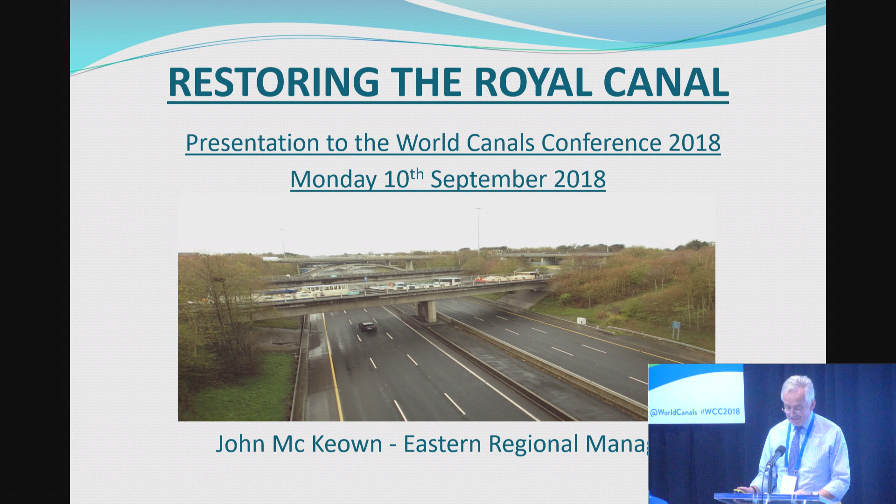Firstly, I'd like to give you a brief historical background of our inland waterways. Like any restoration project, it's a classic story, so it has a happy ending. The photograph you see on the screen there was conditions of lock gates that I would have come across back in 1987, at the 18th lock in Thomastown, where some of the Royal Canal Amenity Group and Inland Waterways Association tried to staunch the gates by putting plastic up along them to try and keep water back in the levels again. We're going to cover 229 years in about 20 minutes, so I'll ask you to fasten your seatbelts and away we go.

From the middle of the 18th century to the middle of the 19th century, there was an extensive network of inland navigations constructed in Ireland, mainly by governments and private corporations. It was mainly there to provide an efficient means of transporting the goods that were transported on the poor road system at that particular time. But the network consisted of about 1,350 kilometres of canal, 270 locks, and many fine structures of arch bridges, aqueducts, weirs, siphons, and culverts.

It was proposed in the 1715 Act of Parliament that a large number of the rivers in all 4 provinces in Ireland were to be made navigable and were going to be linked via a series of navigable channels. While the main act was to develop the bogs and wasteland of the Midlands, it was envisaged that the opening of the navigation canals and rivers would improve the communication throughout the country.

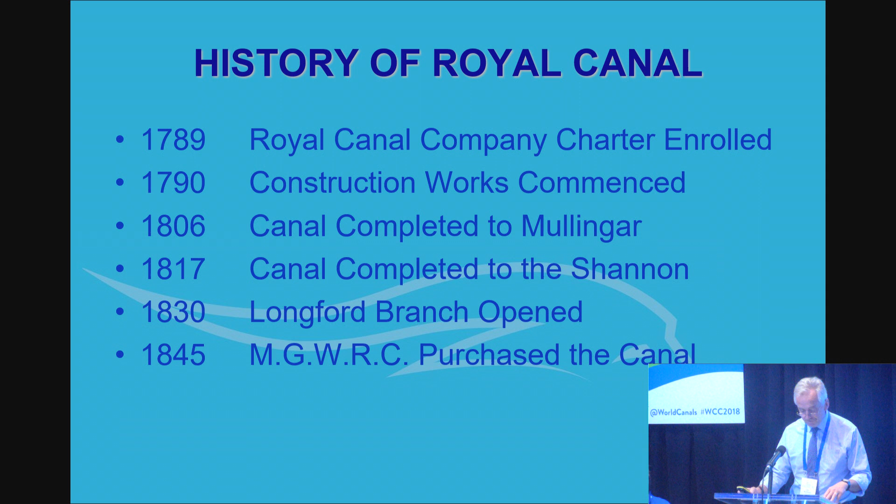Spencer Dock then was opened in 1873, which is much later, and with the Midland Great Western Railway Company purchasing most of the canal, it was the adjacent lands that they were interested in, in order to put the railway going westwards.

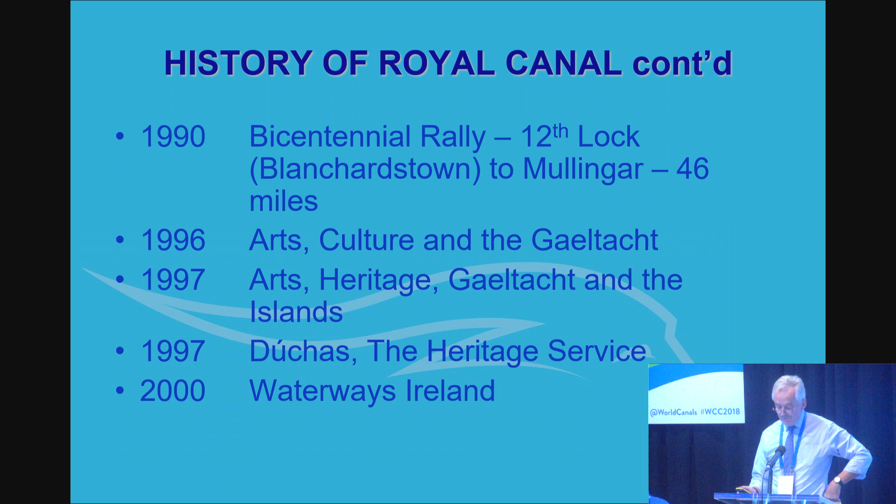Construction of the Royal Canal was to prove long and expensive - approximately 90 miles in length, it cost about 1.35 million, which was 15,000 per mile, and considerably more than the Grand Canal at that time. But the extravagant scale of the fine harbours, aqueducts and structures were much better than the Grand Canal.

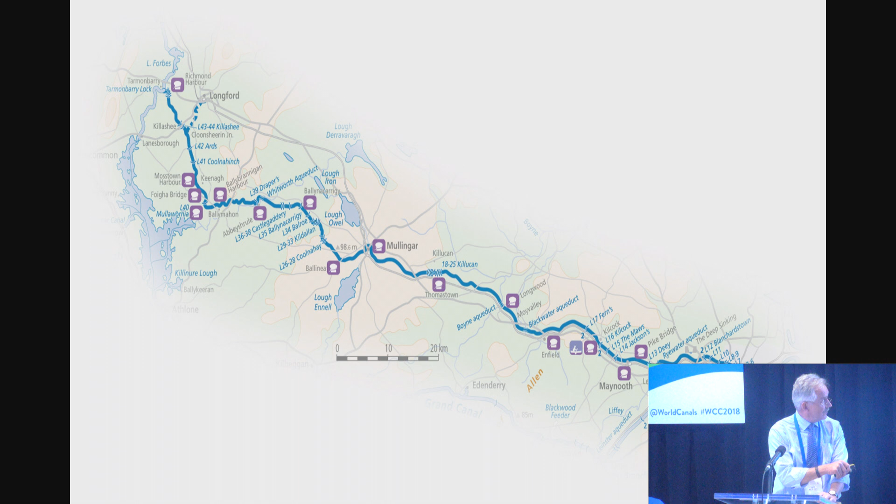The route of the canal as well, as I said, goes right up through Dublin, through Maynooth, Kilcock, Enfield, up to Thomastown where you've got this flight of locks, into Mullingar, onto the summit level, which is from here to here, and then the extension right down to the Shannon on the western side.

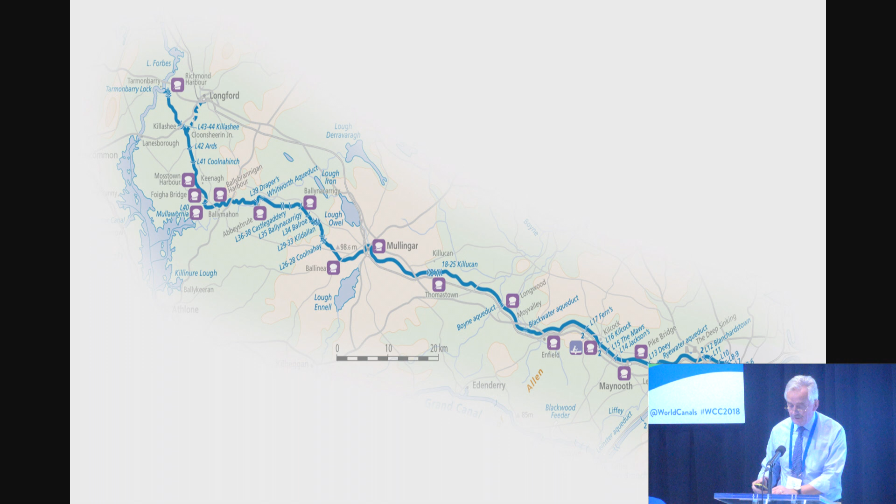The canals in Dublin, here, right up through where we've got various structures going right up through, and our offices are based here at Lock 10 on the Royal Canal. As we move out then, it explains it as well.

Many fine aqueducts, as I mentioned earlier, and some of those restoration works I will actually explain to you now.

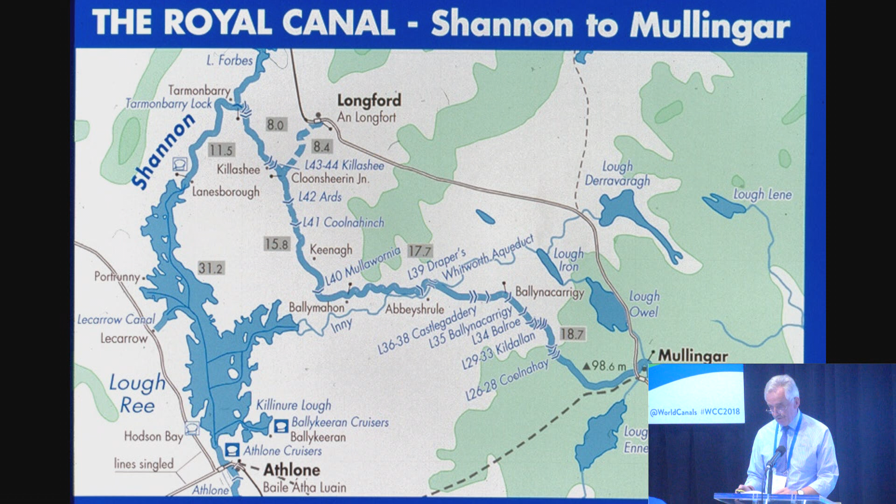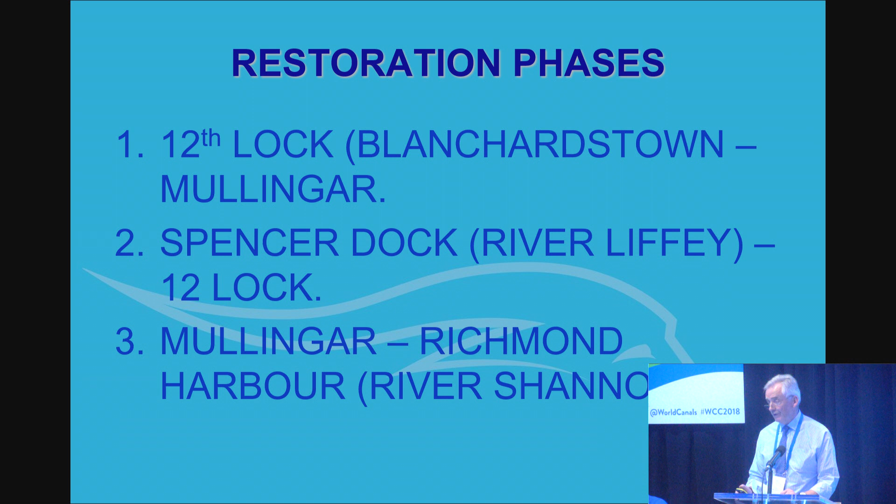The restoration took 3 phases. We decided to go for the low hanging fruit first, and the 12th lock at Blanchardstown to Mullingar was the first phase. Spencer Dock to the 12th lock was only a 6-mile stretch, which was actually very costly due to the removal of all the dredged material, and Mullingar then to Richmond Harbour.

CIE, in their wisdom, who were the previous owners of the canal, decided to truncate the beams - they were cut off so that they wouldn't be used for navigation. And then everything disintegrated thereafter, with weeds growing up in the channel.

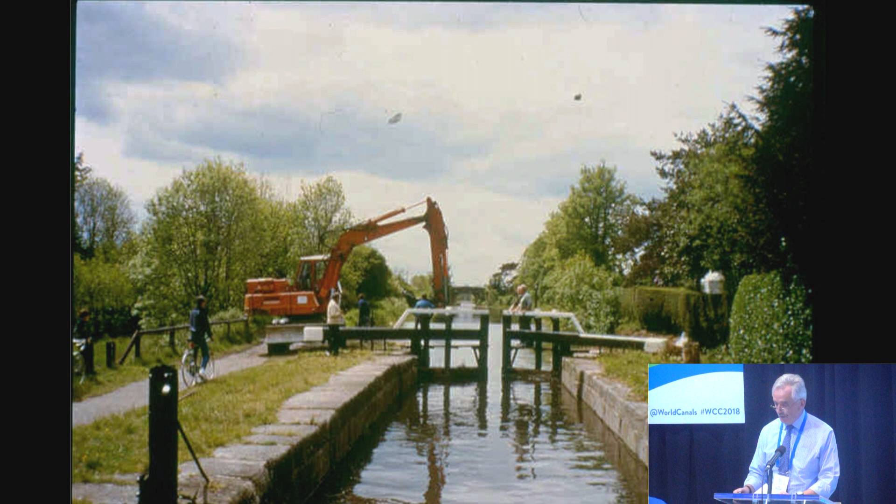This is what it looked like when the gates were installed by the Royal Canal Amenity Group before we took over in 1986. This is what it looks like today - a bustling restaurant, a 10-bedroom hotel on the left-hand side, and apartments on the right-hand side.

And then one of the barges, one of the heritage boat barges, travelling through the lock during one of their rallies.

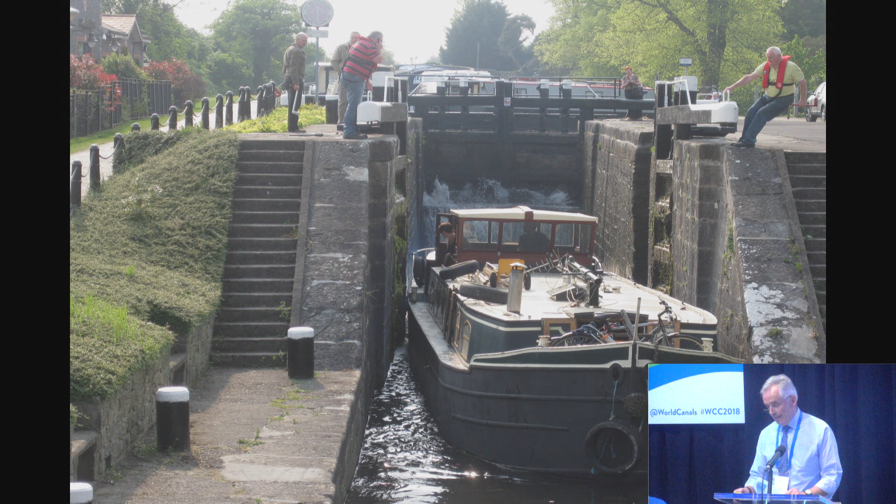We are continuously making up the lock gates. We're passing on those artisan skills, which is very important. These are lock gates that were currently installed at the 17th lock, at the start of the long level.

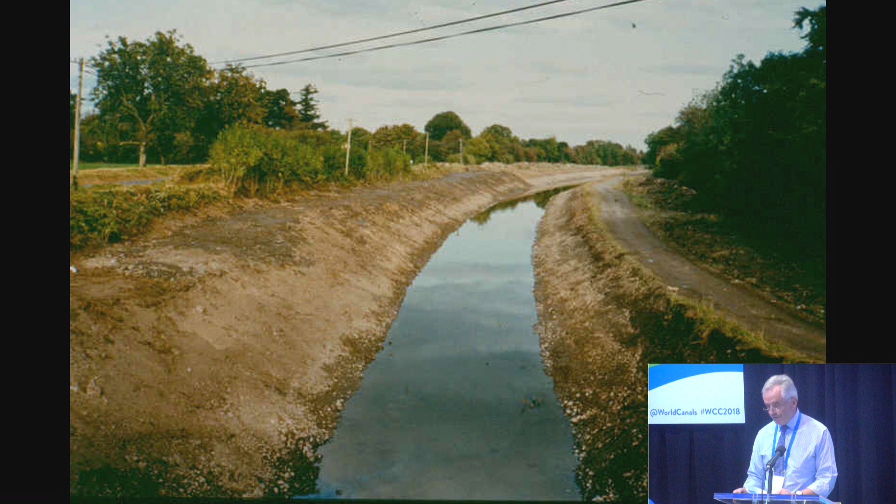Some more of the pre-restoration. If you keep an eye on the overhead ESB lines there, you'll see them again with the dredge channel - lock gates in dire need of repair, and restored.

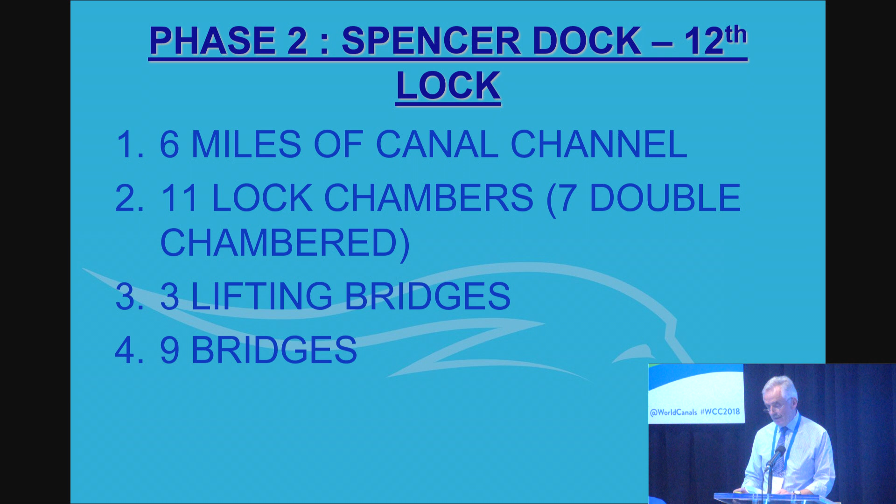Phase 2, as I said, was a 6-mile length of channel, but with a lot more structures, lifting bridges and obstructions to restore. We had the Scherzer bridges at the entrance to Spencer Dock - that's a boat entering now, so it was actually navigable, going up into Spencer Dock itself.

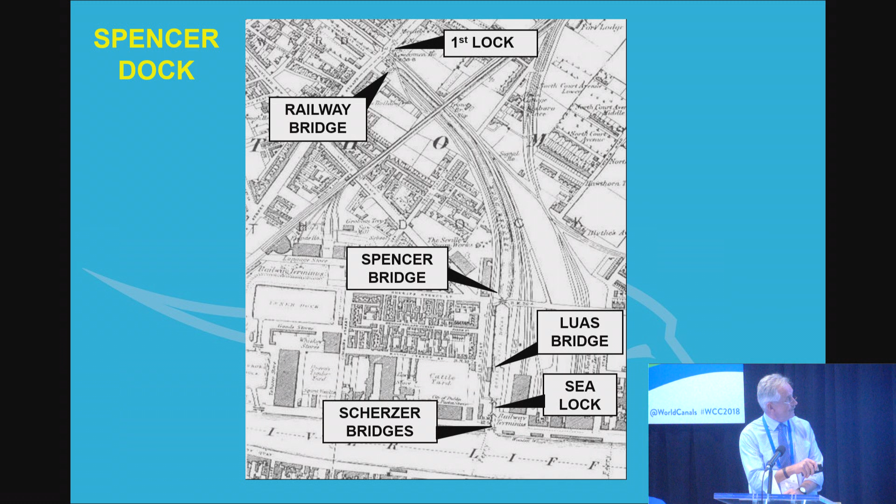In Spencer Dock we had a lot of obstructions. As I said, the Scherzer bridges at the entrance, you had the sea lock which had to be reconstructed as both a navigational lock and flood control, a new Luas bridge, new transport, Spencer Bridge, and the railway bridge up here, the Newcomen lifting bridge. So there was a lot of obstruction in this stretch, which was originally tidal and then made non-tidal with the installation of these new gates.

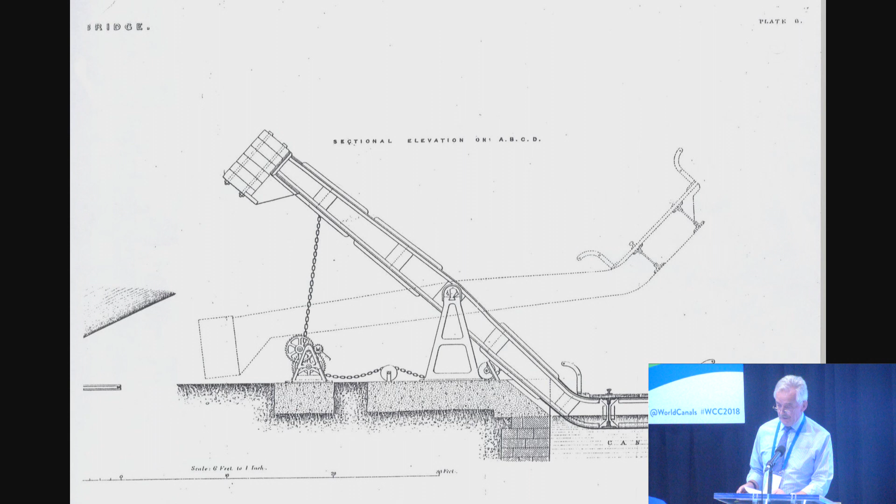We had one of these particular bridges, called a lifting or bascule type bridge, a balance bridge, which was taken out by CIE at the time. This was a drawing of it, which we still have in the office. This is what we were left with - hopefully nobody here works with CIE because I'm throwing a few curveballs at them. They put in culverts in the canal, which meant some boats coming through couldn't get through because of these culverts, so we had to think of a method of taking them out. A lifting bridge was put in place, and here it is with a barge passing out through it.

The interesting point is, whenever we were dredging this particular stretch, we couldn't leave the excavators out at night time because we were scared they'd be broken into, tracked up the bank, the wall broken down, and there'd be a massive escape. So we had to bring them in through that gate into the vacuum - anybody who knows anything about prisons, there's a vacuum between a high wall and an inner wall - so it had to be parked in the vacuum. That was laborious, getting it in every evening across an old Bailey Bridge.

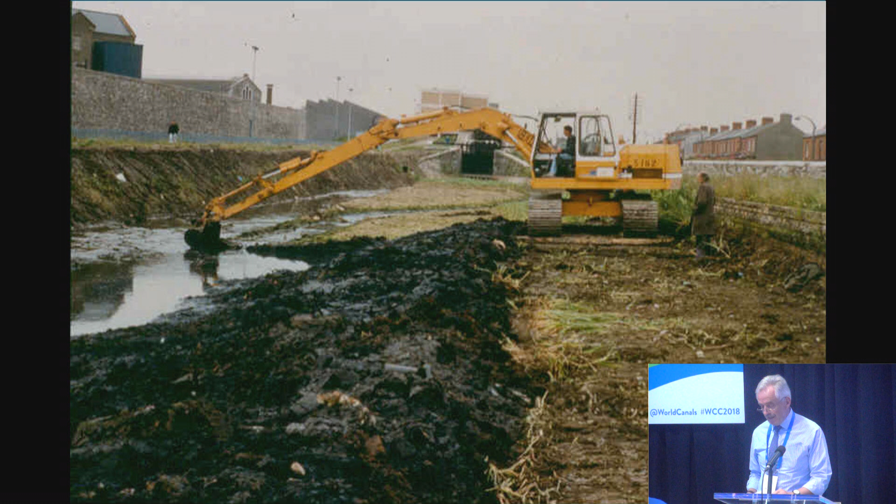As you can see, the wide stretches of the canal had to be bitten at in several chews. The machine was down in the bed of the canal itself, pulled back, and then worked from the bank, and all that material had to be moved away by Moxy dumper. This is what it looks like today, the same stretch.

Up at the 10th lock, the closest lock to our regional headquarters - and just in case you think I'm a real butcher altogether, you'll see the trees on the right-hand side. They're Leylandii, which are rubbish, yes, you don't have them. So I knew what I was doing, so that's what I did there, okay?

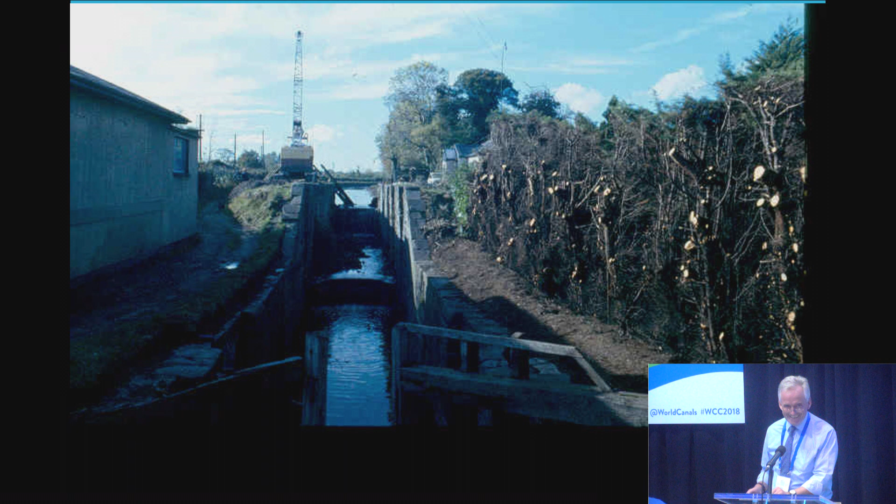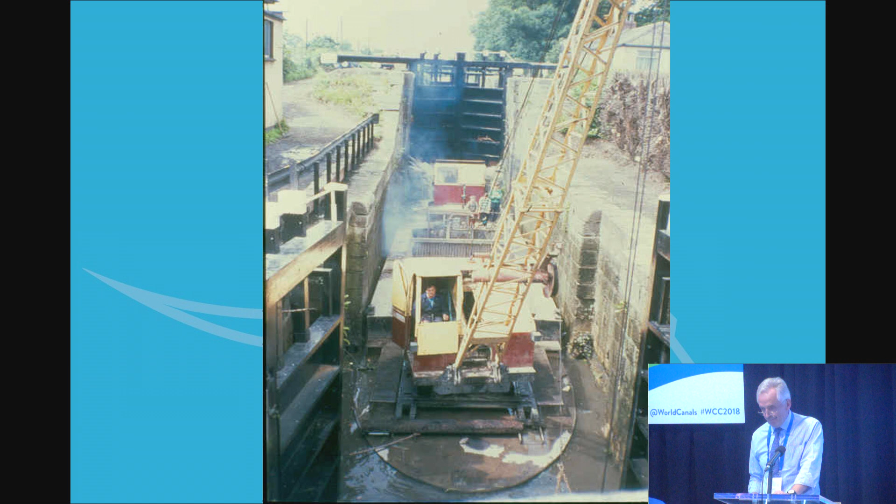So this was the canal without the gates, and this is a very important shot for me, because that particular machine there, called the 33M, did a lot of work on the canal dredging with a 10RB machine in front of it. That's all I was working with back in 1987 to the early 90s. So that means a lot to me, that machine going through the 10th lock fully restored.

Just to give you an example of one of the things we actually had to remove, or construct - the Navan Road interchange. This is the Royal Canal, with a railway running alongside it. They decided to build an interchange here, but then decided they needed a new orbital route travelling around the outskirts of Dublin, heading from Dun Laoghaire right through to the airport. Some of you might have passed below it, and some going on the post-tour will be visiting this structure on Thursday morning. So they decided: do we go over that junction or under it? They decided to go under it, and this is the next story.

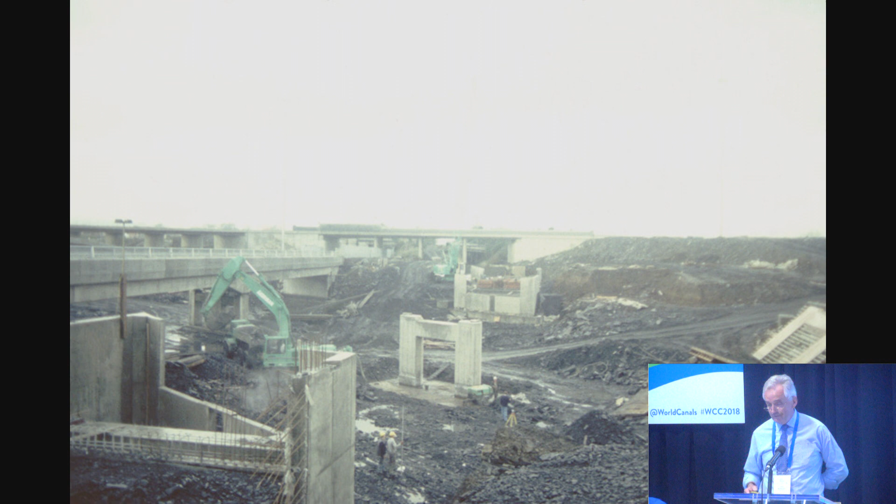So we actually had to build a new viaduct for the railway, a new aqueduct for the canal, while keeping the railway live and keeping the water flowing with inverted siphons - it was a nightmare. This was the channel itself with the fendering being put on, the Azobe fendering being put on to the side of the channel. This is in partial reconstruction.

This is it in another stage, with the M50, the main motorway, going in below. This is what it looked like when it was opened, with the canal going out through, the railway going out through, a major interchange. As I always say in giving talks like this here...

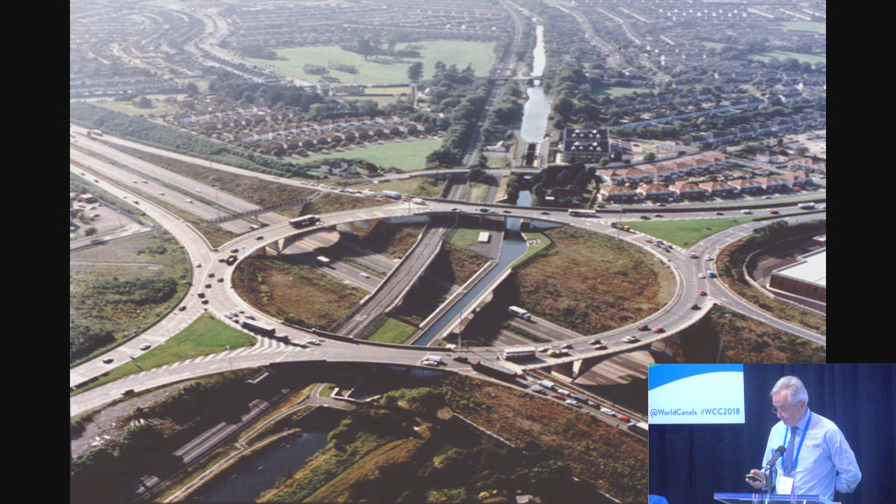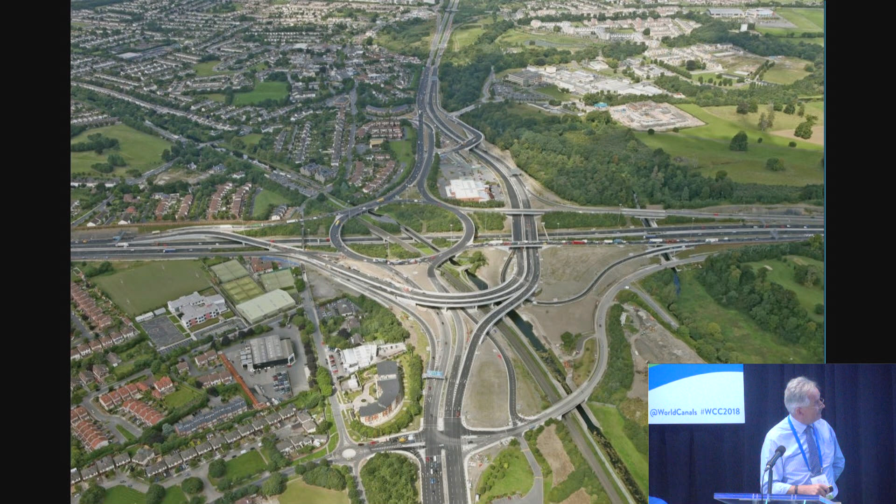England, or the Canals and River Trust, or British Waterways formerly, have a similar junction called Spaghetti Junction outside Birmingham. We call this, in Irish parlance, Tagliatelle Junction. Boats go out through it, and this is what it looks like today, even more complicated, with a whole series of roads going out round. So as you can see, it's a fairly complicated construction, but the canal has been kept alive right through it, and that's the most important thing.

One of the examples we had was a lovely masonry arch bridge at Moran's Bridge. Anybody that's experienced it, you can come up over that bridge and you don't know what you're going to see on the other side, because you come up over the crest of the arch. Unfortunately there was an accident at that bridge, and the local authority decided, no, we'll wipe it out and we'll put in this.

So the specification was that a small boat could get out through here, which was actually a small rollback weed boat. Now, I know that doesn't mean a lot to anybody, but Joe Caffrey there knows what a rollback weed boat is. So that was the specification, and you can see it's only a small boat.

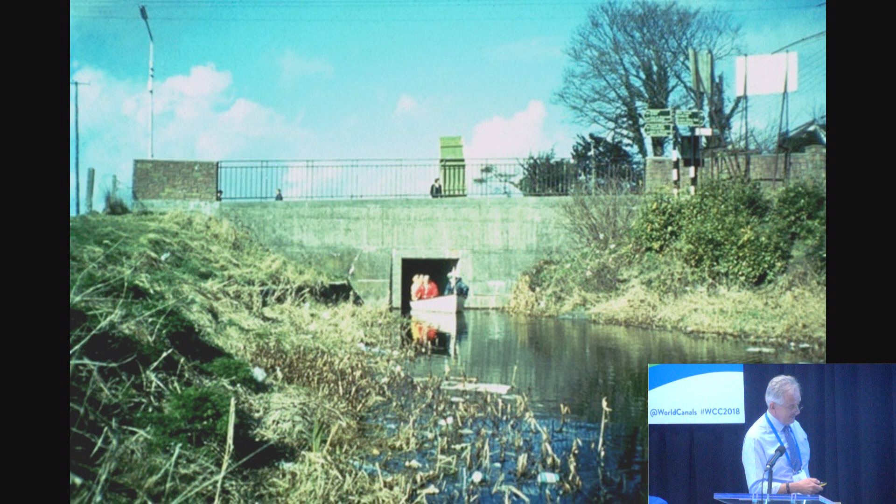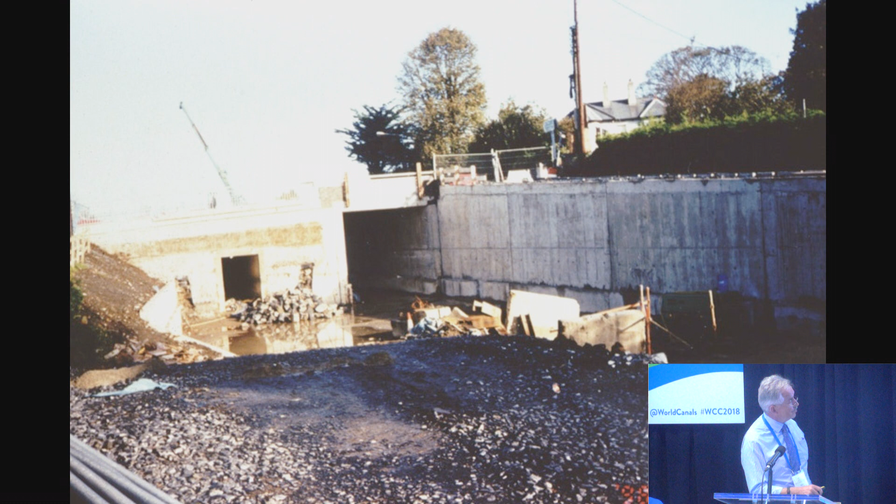So we actually had to think of a way we could get this solved. The solution was - that's the small opening that was left. We moved the whole thing 6 meters upstream and created a new channel for the boats. And that's what it looks like today, and that's some of the boats heading through it, the wilderness boats. Some of the UK visitors will know the wilderness boats.

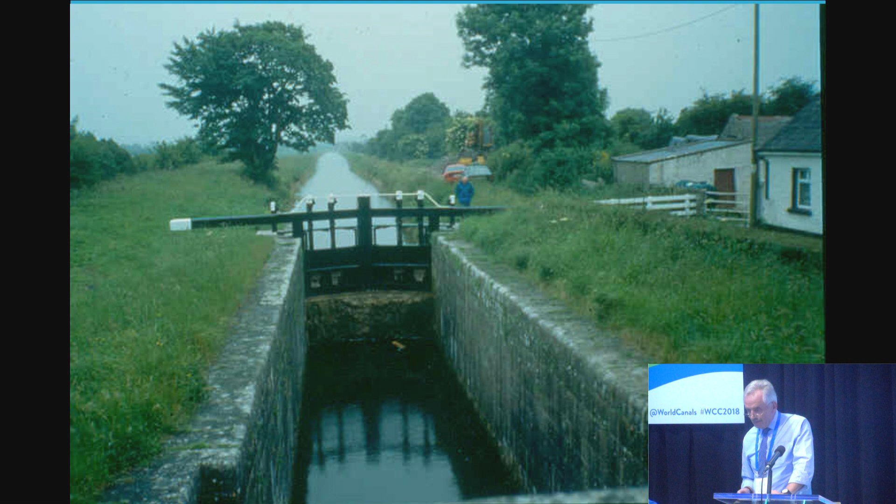Navigation preserved again. I'm only showing you a couple of examples, but there were actually 9 of these obstructions, each of them costing in the region of 2.25 to 2.5 million to remove.

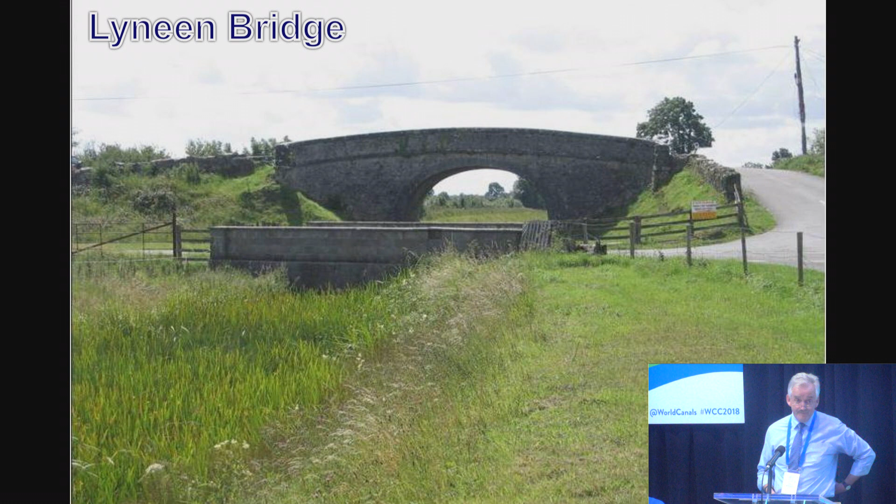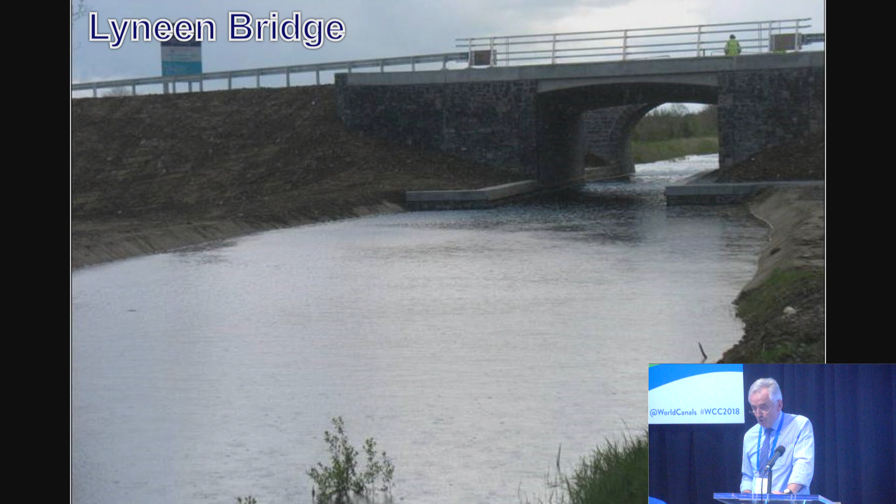So there's another obstruction, and that's what it looks like today, looking through the eye of the new bridge. That's the two of them living in harmony, the old and the new. And what costs the money is we have to super elevate the road coming up over the bridge to provide new sight lines, so that you don't come out over a masonry arch bridge and not see somebody before you hit them.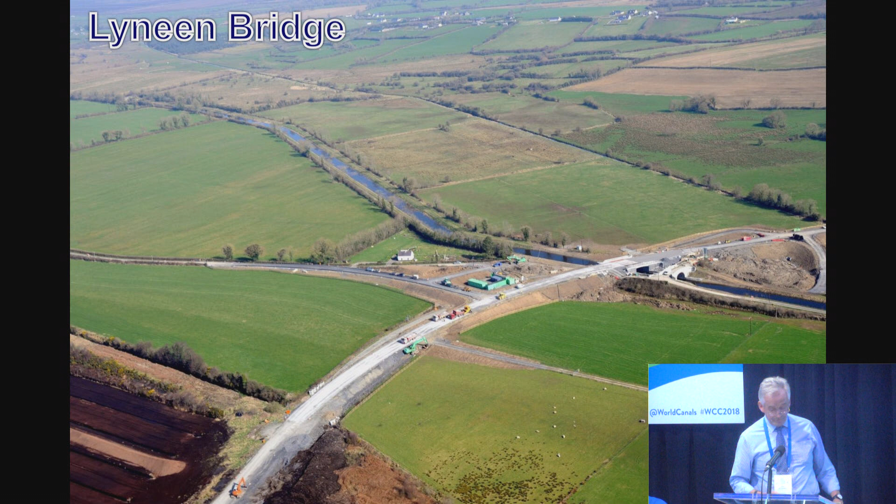Like Begnor Bridge, another obstruction, and because of the skew to the canal, we actually had to put in a lifting bridge at this location. So that's the lifting bridge put in, shown in the up position.

Sections of lock chambers, some of them had to be rebuilt as well. I have to fly through these, I'm running out of time. So you can see the counterforts of the lock walls, and the chamber itself. All the blocks had to be numbered and rebuilt in some occasions around the hollow quoins of the gates themselves.

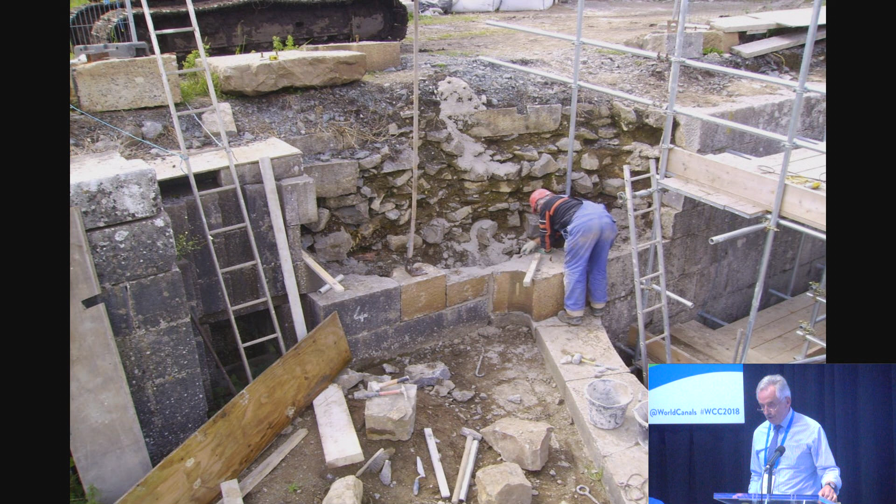Some grouting of the sills had to be carried out. You can see the extent of the work, and the lock restored, ready for action again.

A very important day was Friday, the 1st of October 2010, another milestone in the chronological history of the Royal Canal, after a culmination of 36 years of work by the Royal Canal Amenity Group and the Inland Waterways Association. Our Minister at the time, Pat Carey, was in attendance.

It was mentioned earlier about Ruth Delaney here as well. So a very, very important day. This was the band of brothers and sisters who actually worked on that over the years.

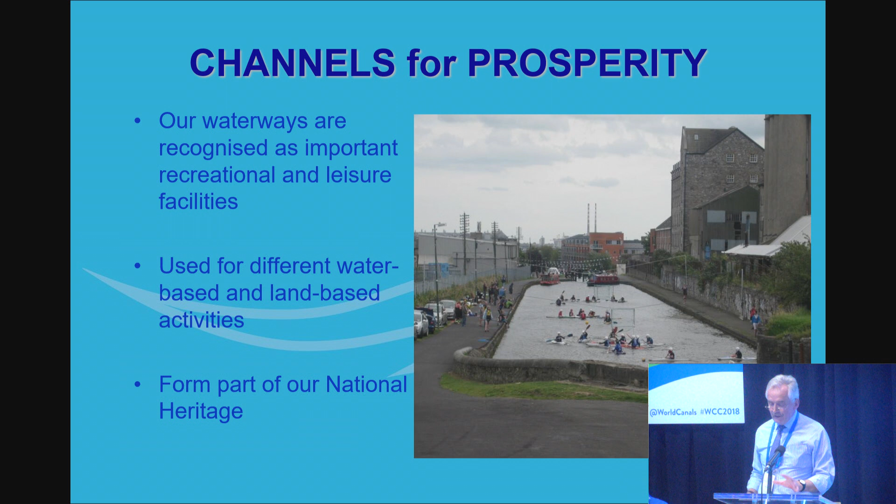So all I can say is this is the terminus of the Royal Canal, and it's working very effectively at the moment. So our channels are channels for prosperity, and they form a real national heritage, both historically and architecturally. Just some of the uses: angling, canoeing, cycling.

Our aim for Waterways Ireland, as was said by Dawn this morning, is to manage, maintain, develop and restore the navigations under our control. So we're about to finish, and the restored Royal Canal can again be appreciated as a major engineering achievement.

John Killaly, our hero, who designed and directed the construction of the Royal Canal extension, would be proud to see the canal completed in 1817, restored in 2010 to its former glory. And as the Freeman's Journal said of this son of Offaly, in the walks of his profession, he was unequalled in Ireland. So thank you for your attention.

Thank you very much, John. I've known John for a long time, and I've spoken on various occasions with him about some of the frustrations he's suffered over the years. And while he made a kind of a quick gallop through that history of the restoration of the canal, I can tell you it wasn't all plain sailing. And we know that, John, and we really do appreciate it. I think the canal and waterways enthusiasts in Ireland owe John a huge debt of gratitude for pulling that off.

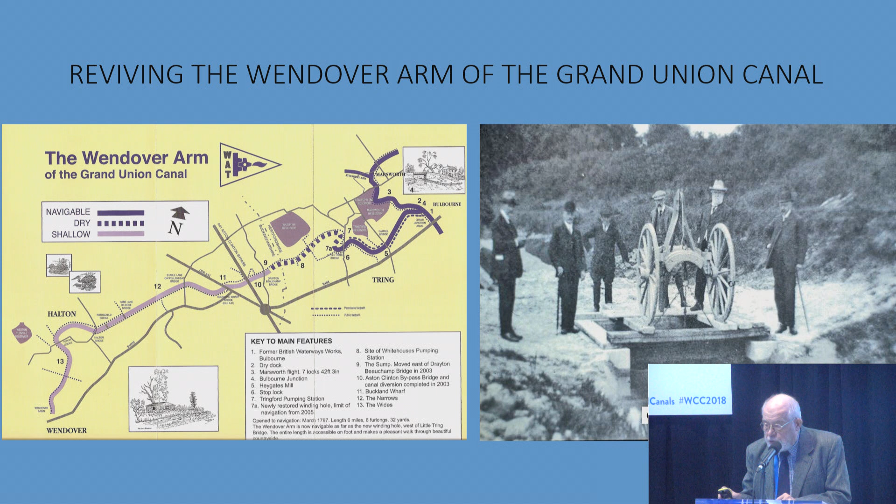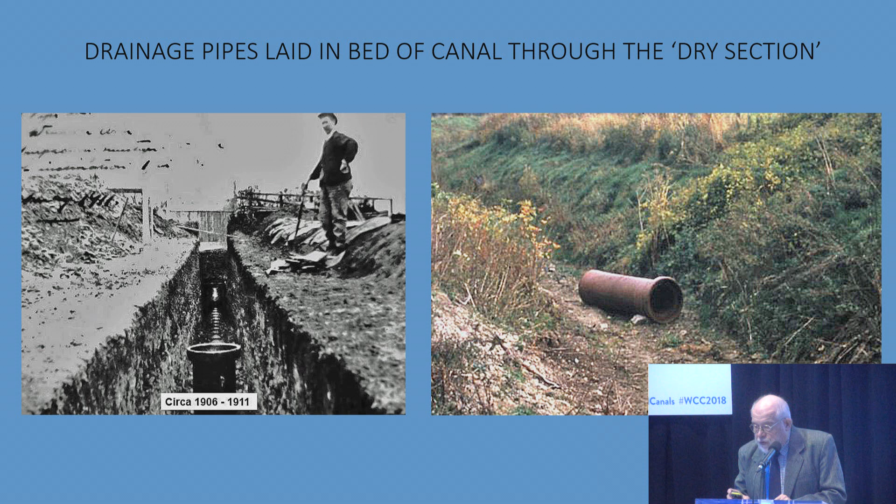The pipes were laid in the bed of the canal through the dry section - one old picture and a new picture giving you an idea of the size of the pipe that was put in. The problem was that when you dry out the canal bed, foliage takes over, trees take over, and effectively it almost disappears. The first stage was to get some water into the section at the beginning of the canal where boats could get in, but they couldn't turn round. So the Wendover Arm Trust decided to put in a winding hole, and this was the first job that they did.

They did this in a section that held water, but they didn't take a chance. In effect, they concreted the bottom, concreted the side, and then spread soil over the bottom to make doubly sure that nobody dropped an anchor through the concrete.

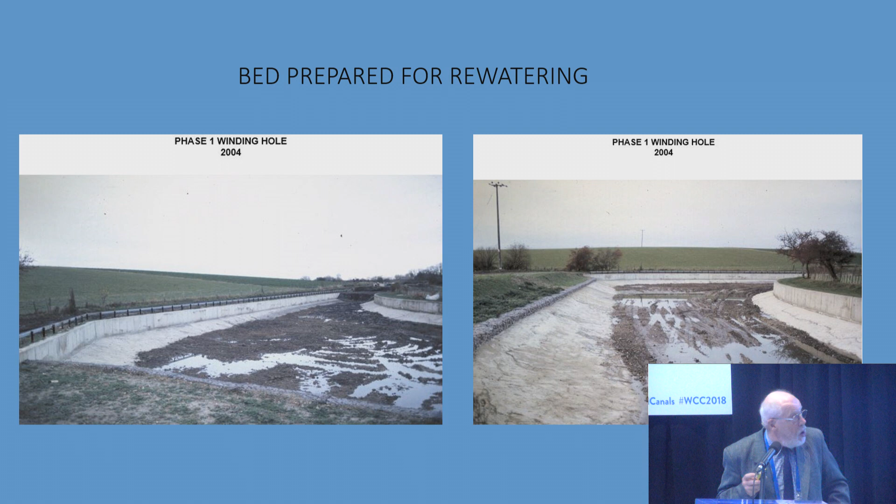So we had a new winding hole created on the Wendover Arm in 2004, and this is what it looked like in 2007, where boats could come down the first section of the arm and moor up down there, which everybody enjoyed because it's right out in the countryside, and it was a practical way of moving forward.

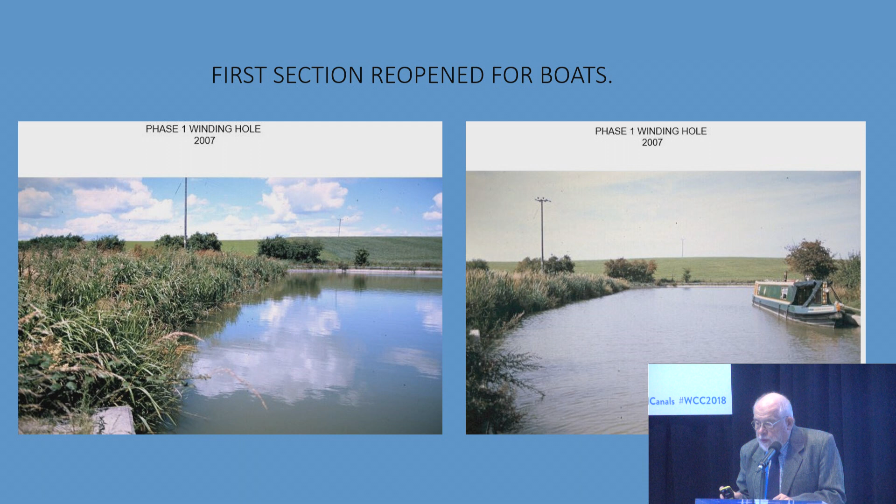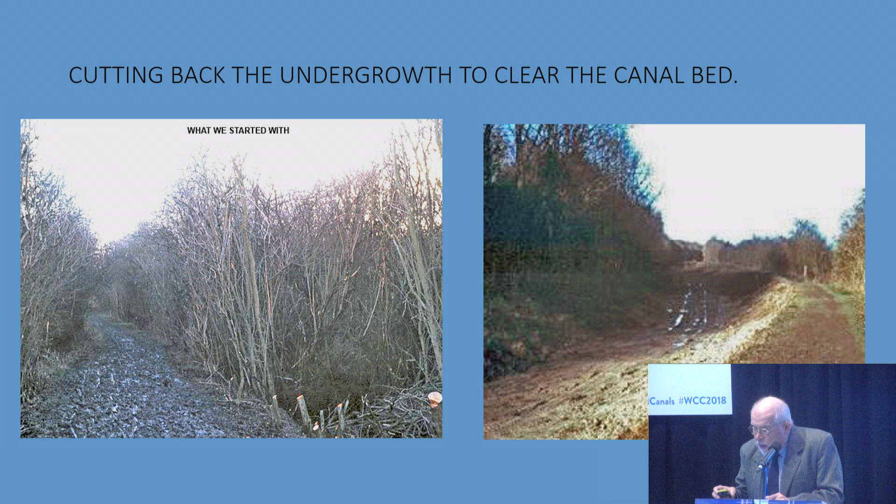The next problem was, how do you open the section with the chalk under the bed? This is what we started with. You had to clear out that undergrowth, and the picture alongside shows you how the canal bed was pulled out. You can see some white on the side of the picture - that is the underlying chalk, and you will appreciate that if you pour water into a chalk area like that, it will disappear fairly quickly.

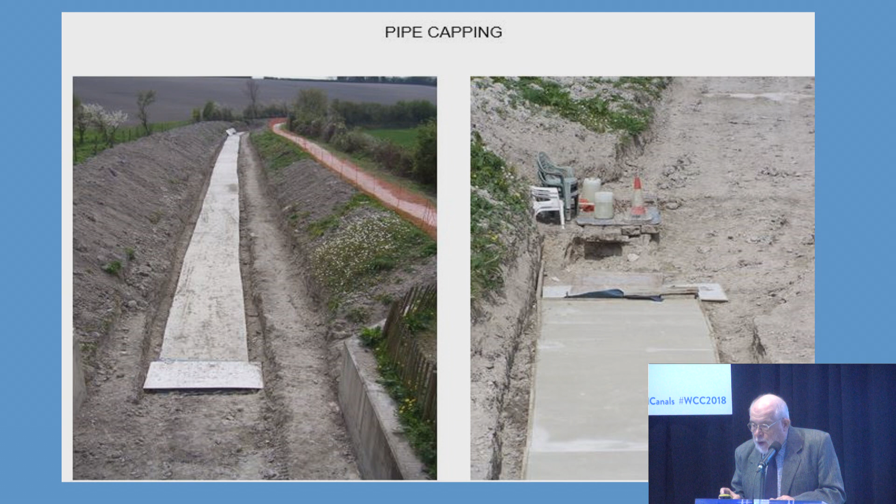The practical problem was, how do the Canal Trust get the canal restored? You had the sump, which was put in with that pump you saw in 1906, and the question was, what do you do? Do they try and take the old pipe out? They couldn't do that because they needed the water supply. So they left the pipe in and put a concrete capping over it, then levelled off the area to make sure they could get an even surface for putting a waterproof bed into the canal.

The idea of putting a waterproof bed in the canal was to make sure that the dry section would not be dry in future. There was a new material that came onto the market called bentonite sheeting. In effect, it's a sort of bentonite clay in between two layers of artificially made Hessian-type material, and the idea was that the bentonite would expand between those two layers and actually make the waterproof lining.

As you can appreciate, if you put in something as delicate as that, you are opening up for trouble. So the idea was that at canal level, they actually put in a covering over the bentonite - you can see the blockwork on the side there. And above the water level, they put in normal earth to try and make it attractive for the walkers who walk along the canal.

The problem was that people wanted mooring bays in that old dry section, so new mooring bays were created using prefabricated concrete blocks and integrating them above the bentonite layer, so that you had the waterproof lining on the outside, and then at the bottom of the canal the bentonite. You put the spoil over the top to stop people damaging the bentonite, and then you get, in effect, a watertight canal.

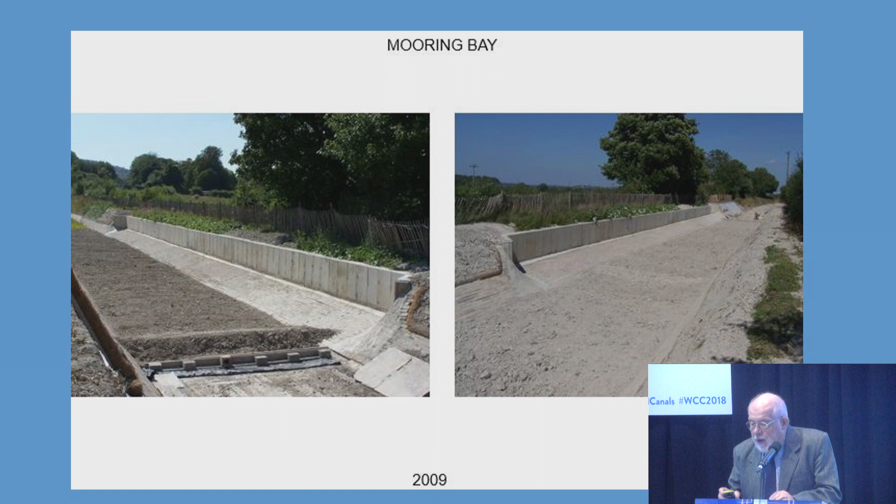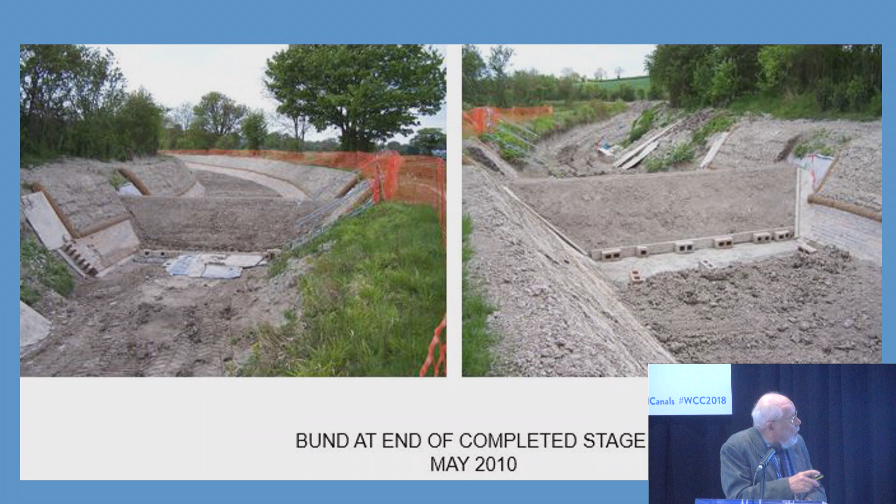The watertight canal looked like the picture on the left-hand side, and this was the aim, to get it looking more and more like a canal.

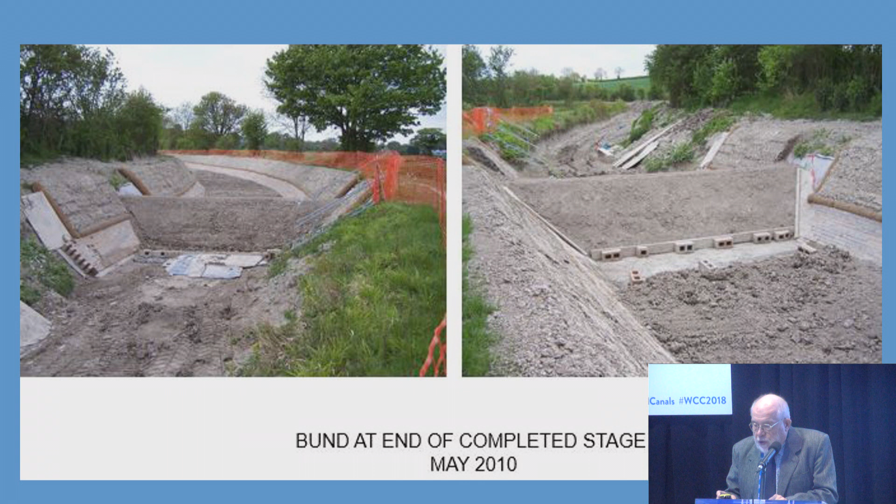There was a small practical problem: in one short area between the winding point you saw at the beginning of the presentation and this next section, there was a bit of contamination - 1% of contamination - but the authorities said we can't take that out. We're finding a solution to that at the moment.

So the canal, of course, had its water supply from the other end, so by actually creating the new canal from where the water supply was, you could actually fill up this section.

So you actually had the old dry section with the bentonite, you reprofiled it, you put the bentonite round to make it watertight, you then put the blockwork around that and the turfing over the top, and you got the image that you see in November 2014, where the sods of grass were put out, the new banks were in, and some fill was put in the bottom of the canal.

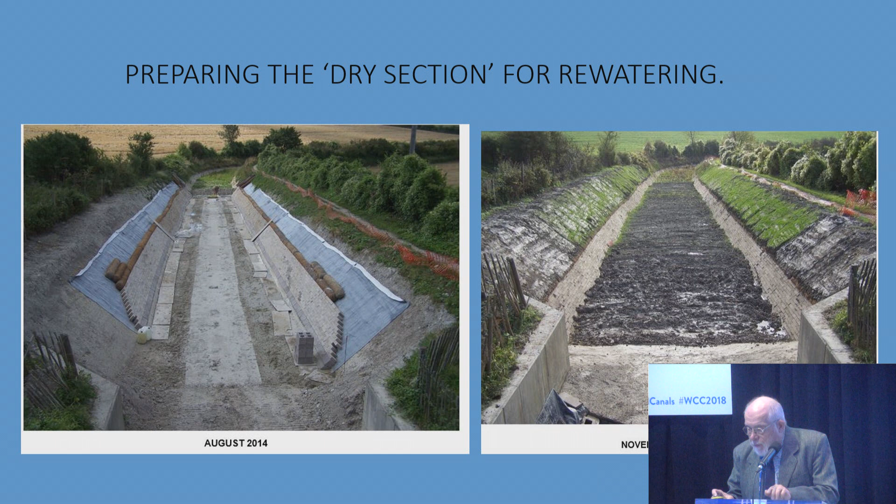The concrete you see in the foreground was related to the mooring bay you saw in the earlier section. The end product, in April 2015, is a nice canal with a lovely towpath on both sides where walkers can enjoy it, and the facility for people to start boating when they can get through that artificial problem I mentioned earlier.

Moving on to another restoration. The Waterway Recovery Group, our navvies movement, has been restoring Inglesham Lock on the Thames and Severn Canal. For those who don't put the two and two together, the Stroudwater you saw in Mike Taylor's presentation is the other end of the Thames and Severn Canal.

Stroudwater links into the Severn via the ship canal that goes down to Sharpness - that's the Gloucester and Sharpness Canal. The Thames and Severn Canal is the other end of that, where it links naturally into the Thames.

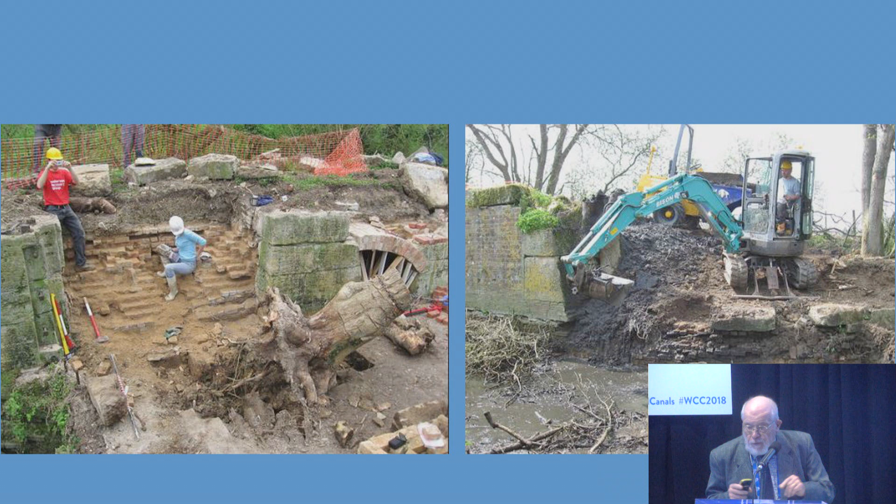The picture here on the left-hand side shows you how you have to cut it out and clean it out before you can start rebricking.

The second problem is that over the years, where those tree stumps have been and where deterioration in the wing walls of the lock has taken place, you actually have quite a job to get down to basics.

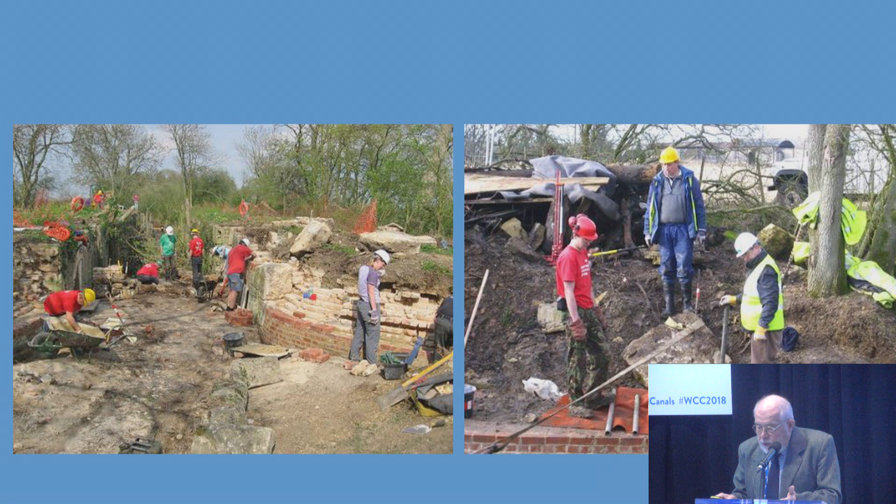Getting down to basics often means cutting out the wing walls and getting off the coping stones, and for many who've tried to move coping stones, 1.5 tons to move in one go isn't an easy task. But the Waterway Recovery Group have become exceptionally skilled at using pipe runners and winches to move the old coping stones.

The Waterway Recovery Group come in and have work camps on various sites during the summer, trying to coordinate the restoration work, particularly where the local canal societies' resources are tremendously stretched. In the left-hand picture you see a whole team at the summer work camp.

The other problem is, of course, that you get water coming along the canal. So one of the first things you have to do is get in some stop plank grooves, and then make sure you are ready to get the walls rebuilt.

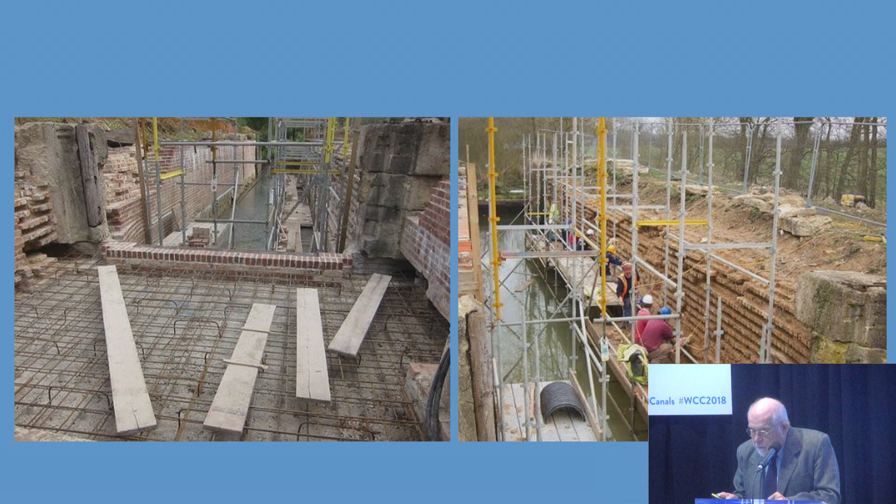The difficulty in restoring locks is often that the sill at the top of the lock has eroded away, and new sills were put into Eisey Lock as part of the reconstruction process.

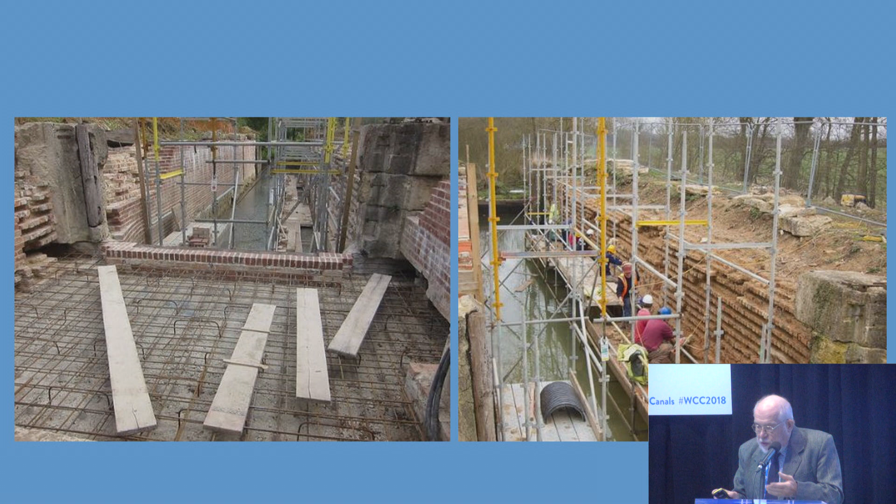Modern scaffolding and hard hats were the order of the day, and this is the way in which the modern volunteer navvies work. The problem, as you have in Ireland, is that in England we don't have all dry days, and it's useful to have a cover if you're trying to slip in some brickwork.

The problem with many of the old coping stones is that they are a variety of sizes, but the aim is to try and get as many back as possible to retain the flavour of the old lock.

Here you see one of the modern volunteers from the Waterway Recovery Group checking the levels, and on the right-hand side you see what the lock chamber looks like after the brickwork had gone back in.

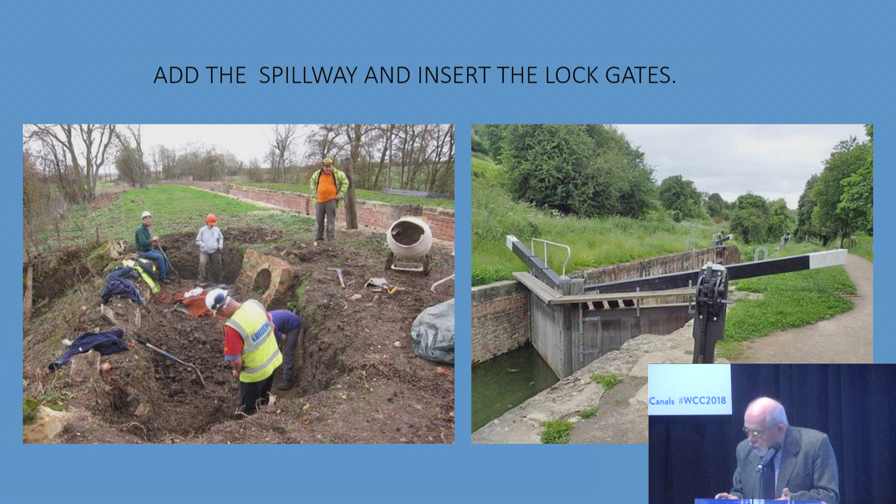The problem then was to make sure that the spillway system around the lock was operational so that you didn't get the earthworks at the side washed out. But at the end of the day, you come along and get some gates and put them in.

The third case that I want to look at is on the Wilts and Berks Canal, near Shrivenham, where you can see the Great Western Railway line paralleled it, which took away some of its trade. It was in a terrible state.

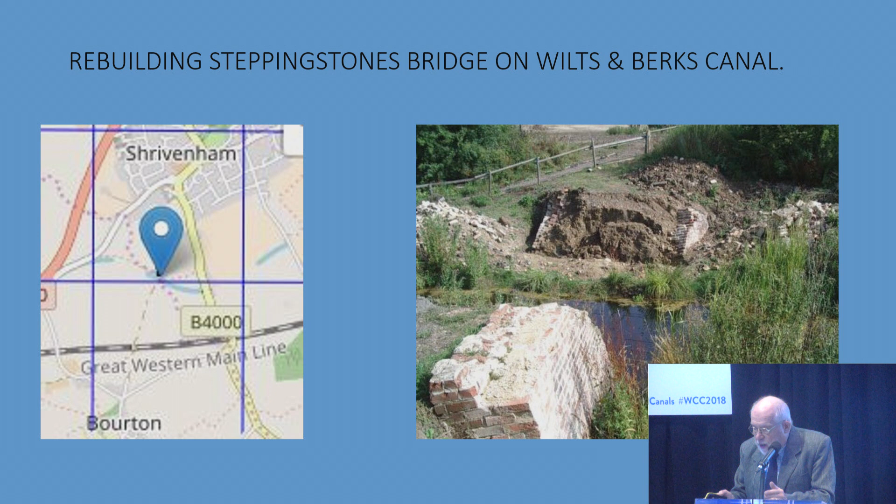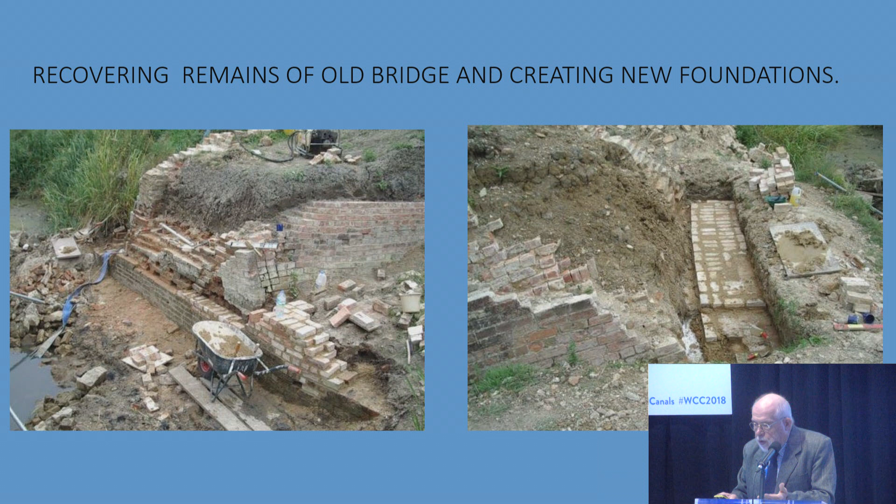Some of the bridges were absolutely shot, and an earth bund was put across the waterway. This meant that even for an accommodation bridge, you had to completely rebuild the foundations of that bridge before you could start creating a new bridge arch.

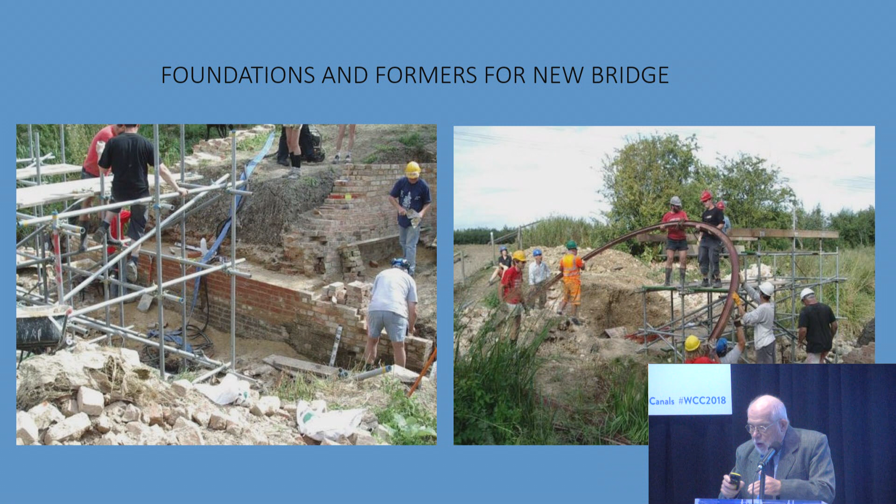Once you got the foundations in, you moved to the modern style of bridge building with metal formers over which you put wooden boarding so that you can get the arch ready to take the brickwork. The old style was very much a simplified version of this modern technique of putting formers in with modern scaffolding.

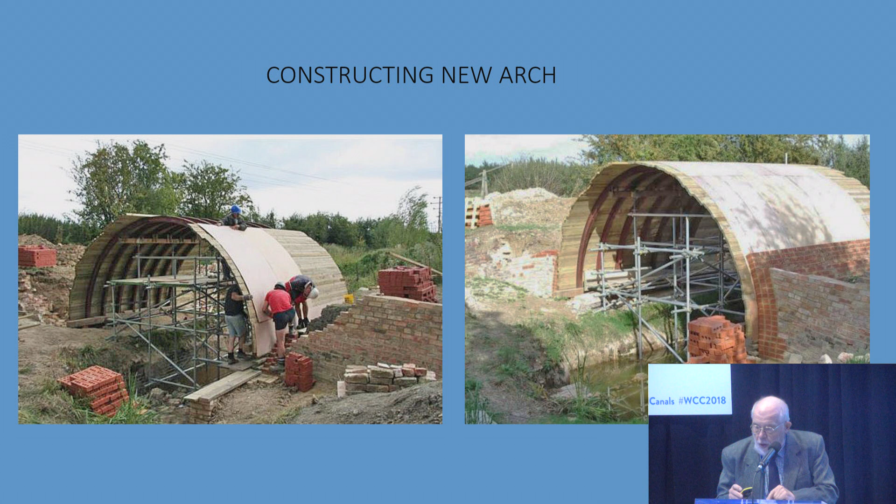And here you see the formers in place, and the woodwork, which is going to actually be the new former for the bridge, in place. And then when you have got that former in place, you lay sheeting over the top to stop the bricks sticking to the timber and enable the new brickwork to go in, which you see going in on the right-hand side.

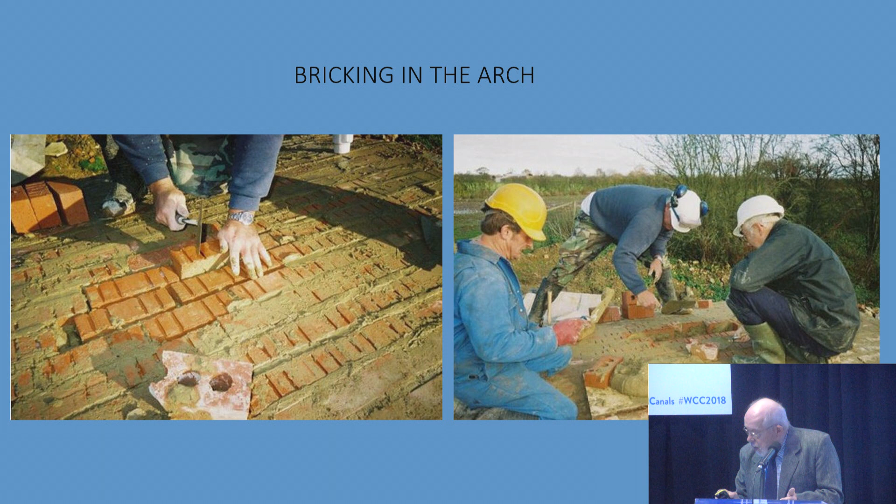Bricking in the arch is a delicate art because it's the keystones, or key bricks, that you put in at the top of the arch that take the stress load around the arch and enable it to bear the weight for which it has been designed. Getting those keystones in on that new arch was a tricky position, but it was a carefully organised job.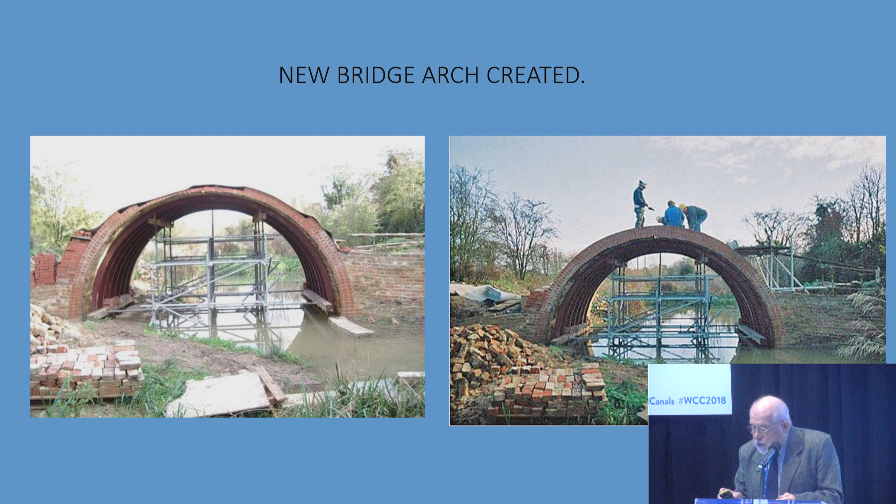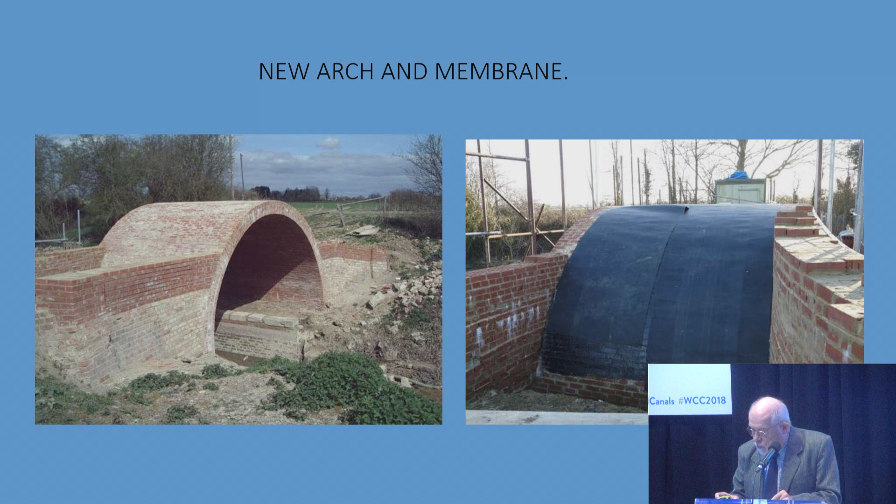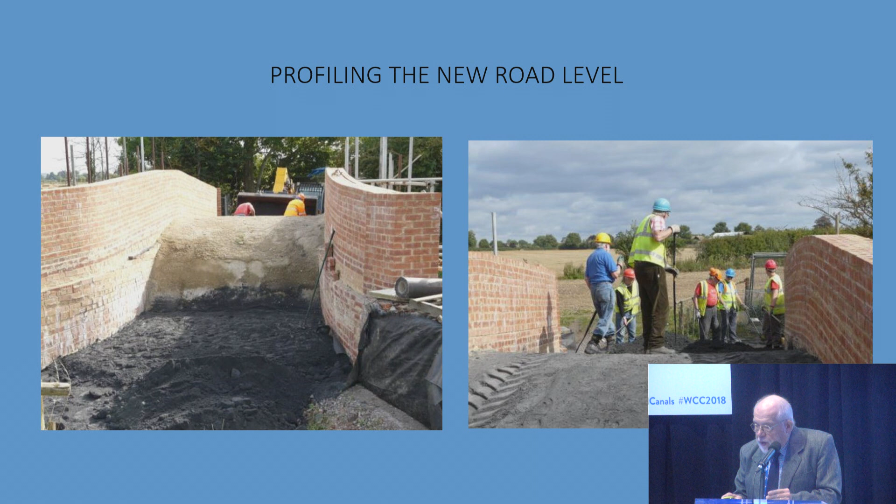This is what the arch looked like in its rebuilding process and how the new arch was created. After you got the new arch ready, you do the wing walls to the bridge, and then you put waterproof sheeting over the brickwork to enable it to have its new bed created over it. The bridge, in a hump, has a problem for logistics of getting traffic over, so you then have to build up the slope to the bridge on either side, and manpower with a dumper truck is probably the best way to organise that.

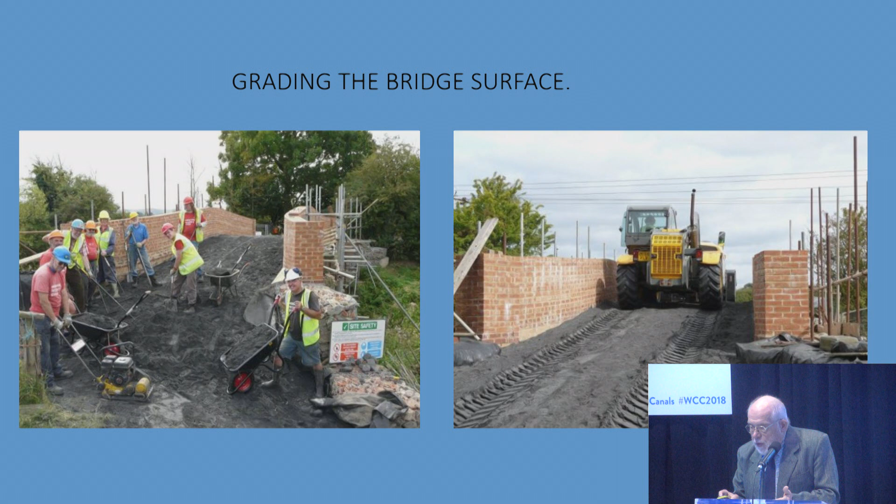So here we have the grading of the surface of the new bridge and testing it by running a grader over it. The new bridge here, Steppingstone Bridge on the Wilts & Berks Canal, is now looking like this. Unfortunately, the canal either side isn't quite ready for rewatering, but the bridge is there, and it means the farmer has got his access to his fields, and it's one less obstacle for the restoration of the Wilts & Berks Canal.

So we've had a look at three case studies, each looking at modern techniques for restoring waterways. Thank you very much indeed.

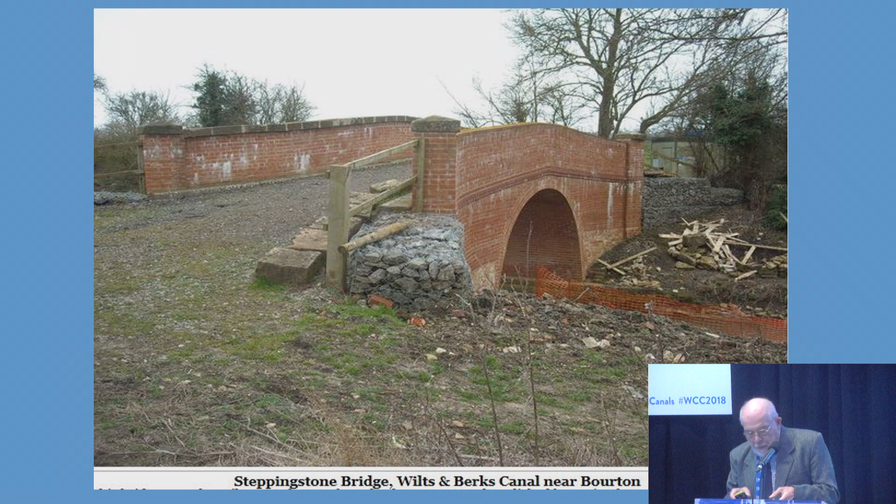Thank you, Roger. That was very interesting, giving us some insights into how you solve detailed problems that arise in canal restorations. I thought the last one was particularly interesting because it reflected something said earlier today, that sometimes in these projects you just do the bits you can and work around the issues until you find a solution. As Mike Palmer so inelegantly said, people do die eventually, and maybe the problems will just go away with them. I remember referring back to the Royal Canal, and the late and great Eddie Slane, who was the champion of the Royal Canal for so many years. I remember asking Eddie, I think it was about Moran's Bridge, and he said, don't worry about it, we'll find a solution when the time comes. Just keep going.

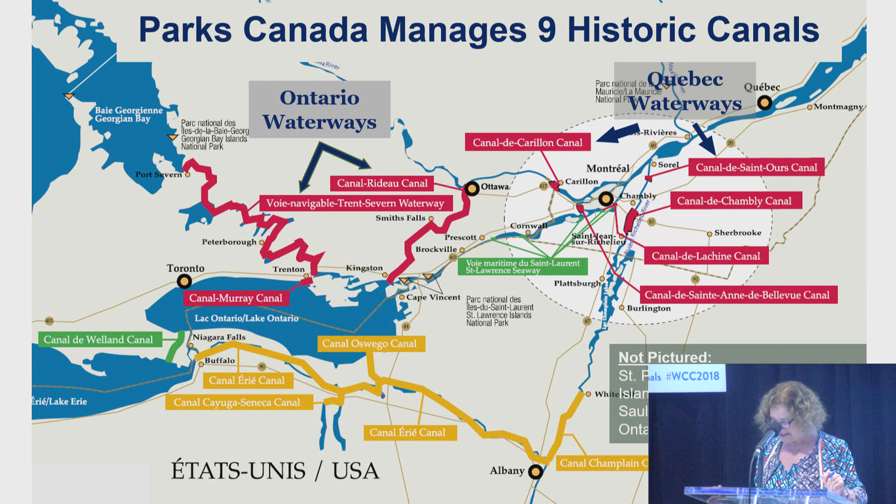Like a lot of the canals, ours began in the 17th century, where 3 locks were established at the Ste. Marie among the Hurons in Ontario.

Our major period of canal building was, of course, in the 1800s. We had the work on the Lachine Canal, finished around 1825. We had the Rideau in 1836. The Trent Severn, another one of our major canals, was obviously a little bit later, and it went from the mid-1800s into the early 1900s.

They were major transportation routes used both by the military and then also commercial, for commercial shipping. And then that operation ceased to exist about the mid or later part of the 1900s. But our canals were very quickly and very early designated for their heritage value and heritage character.

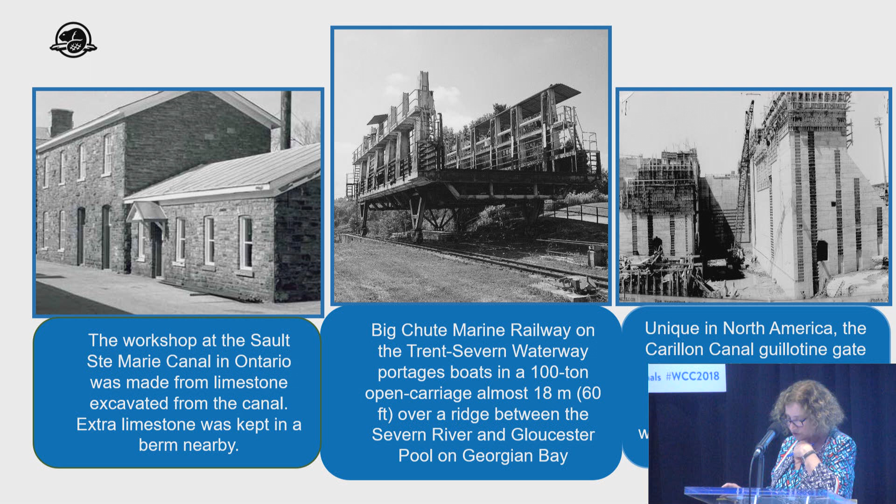Just to give you an idea of some of the structures that can be found along the canals, the one in the middle I just would point your attention to, because it's the Big Chute Marine Railway on the Trent Severn. Certainly, having been there when I was a child, it left me with a lot of memories, and it certainly is quite a feat of engineering to take boats from the Severn River into Georgian Bay, and that has seen a lot of traffic over the years.

So now I want to move to talk a little bit about what's been happening with our canal assets. Our assets are, of course, dominated by locks, bridges, and dams. These are integral to canal operation and also the water management that we as Parks Canada have to deal with in terms of all the different waterways and the communities that are linked and served by our canals.

After centuries of use and limited funding for maintenance and asset replacement and recapitalization, and that's a story we've all heard, the condition of many of these assets had deteriorated significantly, and they were in danger of malfunction or in some cases even collapse. They certainly weren't able to continue for long to be able to service the type of use and the level of use that we have.

But thankfully, very recently, and of course we did have capital budgets over the years, but they tended to be very insufficient. Thankfully, back in 2014, the Government of Canada recognized this significant issue and gave us an unprecedented budget for all of Parks Canada's assets, $3 billion to be spent on replacement, recapitalization, and renewal. The canals received just over $1 billion of that amount. So that, of course, changed the game in terms of what we were now able to do.

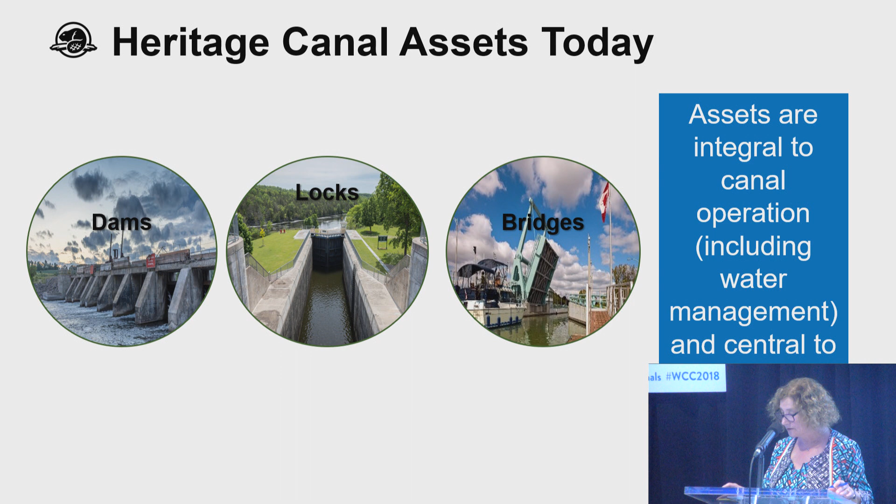And so that really has helped us in our efforts, and I'm going to talk a little bit about that now. So I can't go into all of the challenges today, but I want to talk about some of the renewal challenges related to safety standards, water management and flood response, changing demographics, and public expectations. Certainly, some of my colleagues in Parks Canada, Joel and Lauren, are going to be dealing with some of these aspects.

But I want to talk about these things, starting with safety standards, and I'll go into each of these. Of course, the specifications that our projects must meet and the costs of the projects related to replacing and renewing this infrastructure - it could be the additional lanes on bridges, or to be able to support greater weights, or to add guardrails, anchor restraint systems, lighting systems, whatever. We have high code standards, and of course those have to be, and should be, followed, and that has to be taken into consideration.

In terms of climate change, we've had incredible impact. Just recently, 2017 was one of our worst years. We've seen frequent, severe weather - we don't even think about it in a decade or even 100 years anymore because they're coming so frequently now. That, of course, is causing damage to infrastructure, and it's also having low and high water levels and great effects on us as park managers, but also the community residents.

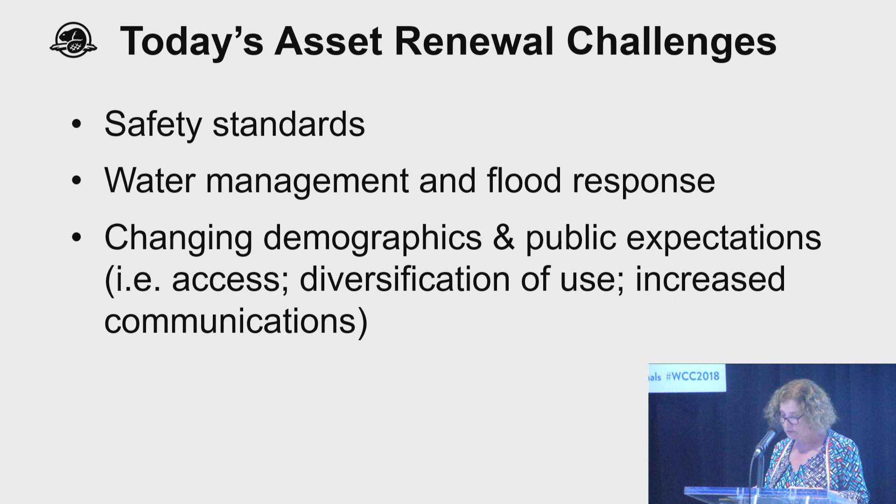Visitors have larger boats, they're more urban, a more diverse audience. And what we're seeing today is there are more inexperienced canal users as well. But happily, they want to learn, they want to canoe, kayak, cycle, walk along the canals, as well as, importantly, boat.

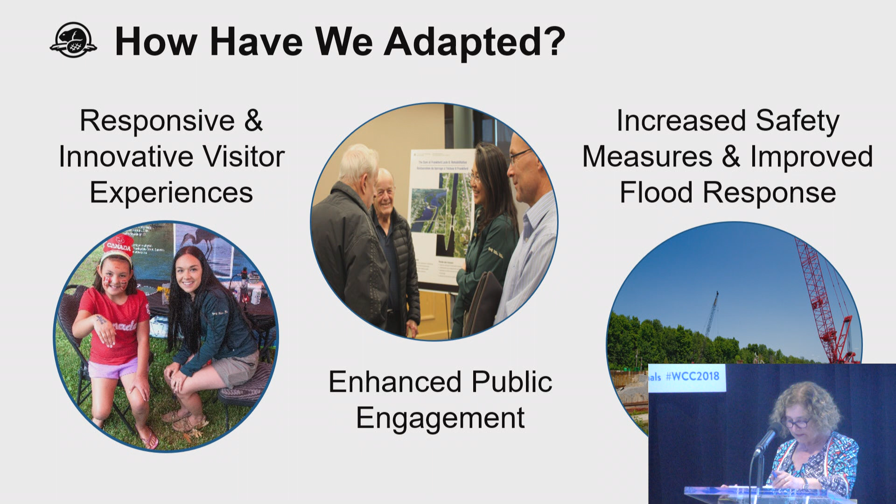So how have we adapted? Well, over the past decade, and more recently as part of our investment program, we have become more responsive to visitors. We're offering innovative experiences, and engaging with our residents and communities more frequently and in more meaningful ways. We're taking extensive measures to ensure the safety of our workers, visitors and users, and to reduce risk. And we're certainly trying to deal better with the severe weather we're having.

In terms of changing demographics, just to show you one thing from the 1970s, we did replace the marine railway to accommodate more boats and more of them at once. That kind of started some of this thinking on what we could do. And obviously we're seeing more mechanization, which is also helping with wait times and to speed up things.

We're also constructing pedestrian and cycling paths, and all of these are usually done in partnership with the municipalities in which we operate. And to accommodate the growing paddling clientele, we're also installing docks to allow users to launch canoes and kayaks.

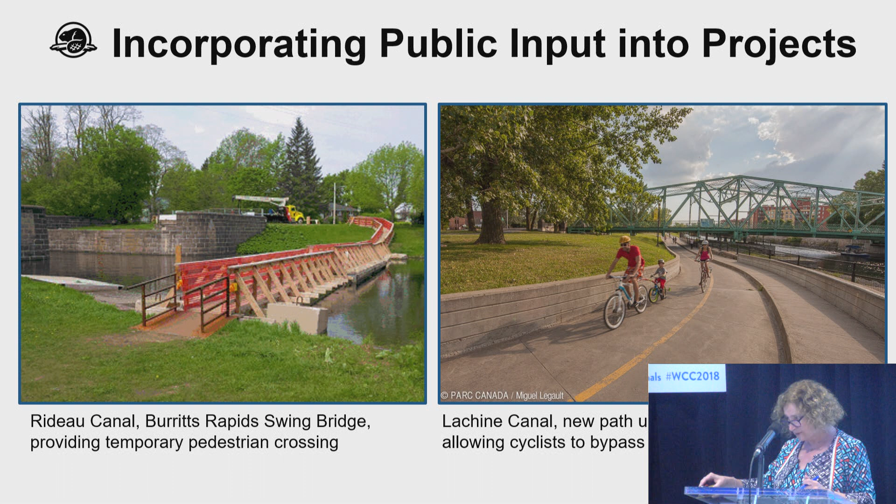In terms of flood response and safety, it means considering these factors in every capital project we take on, as well as in our day-to-day maintenance function. For workers, this means looking at how they work, safe work practices, widening the workspace where possible, making sure we put non-slip surfaces on decks, add anchor bolts and scaffolding to make sure the work they do is safe, and lighting at nighttime because of the 4-year time frame we have for our capital projects.

We often have to get people working at night, so this is really important for the users. More signage, guardrails, non-slip surfaces, and all of this really helps us not only meet code, but make sure that we reduce risk and keep our people safe.

In terms of flooding, we're trying to anticipate and plan for frequent severe weather and major weather events now by building better dams, guard gates to allow water to be diverted, and ways to protect our critical infrastructure on our canals, but also in the communities.

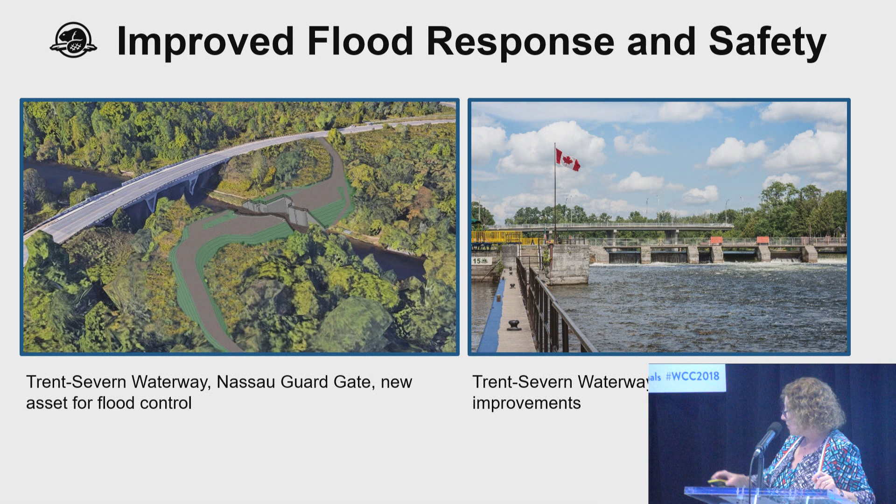So, what's on the horizon? Well, we can only anticipate so many things, however that's what we're trying to do. One thing that's certain is there will be change, and so we need to stay ahead of things as much as possible to respond to continuing changes in both safety codes and also visitor demographics.

We also need to really make our infrastructure and our operations as resilient as we can in the face of climate change and what is happening now, but what can be expected to come in the future.

We also know that we need to continue to adapt and take advantage of new technology, because it too is coming, whether we're talking about ways of engaging or communicating, or ways to build bigger, better bridges, dams, ways to better operate our canals. These are the things we'll be adopting and incorporating as we continue to operate.

And finally, I think it's really important, and that's why we have this emphasis on our users, community residents, and volunteers where possible, because we need to get people knowledgeable, aware of what's going on for starters, then engage, because only with that will we have the support that we need to not only be the agency that operates these wonderful places, but also continue to involve the public.